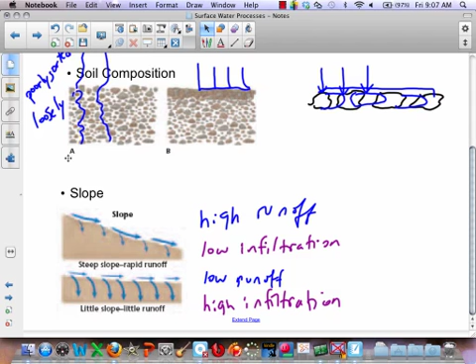I am going to talk a little bit about stream systems today, but we're really going to get into a lot more detail on how streams work, not tomorrow, but on Monday. So I thought you guys might appreciate this watershed, since it does kind of include us in Fort Wayne.

What is a watershed? No, it's not just a shed full of water. You guys ever heard of that before, a watershed? Nope. Is it like that big gallon thing? That's water. Say that again. That's more discharge. We'll talk about that on the next lesson.

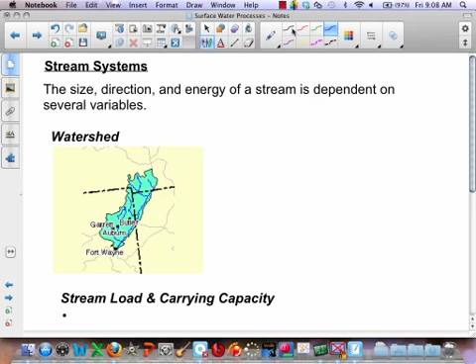The watershed is really the drainage basin for any body of water. So when we think about the river right through here, we're talking about the St. Joe River. That's what this big blue line right here is. And when we think about the watershed, it's all the area. That's the big thing I want you guys to know. It's the area that drains into the body of water.

So you have your watershed, and that's basically all a watershed is. Now the problem is, we think things are far away and won't affect us. But let's say that somewhere way up here somebody is not disposing of their chemicals correctly, and they're just dumping it in the ground or in a small creek. Well, it affects everywhere in this entire drainage basin, because that chemical is going to flow down the river and through the groundwater, and it affects the entire watershed of that region.

So a single location can directly affect a very large area based on the watershed, and that's really important you guys understand that. The other thing I want to point out is this really funny boundary. What is that boundary? Why does it stop there? Think about how water flows. Why does the watershed stop here? What's really going on there? Yeah, so what does that tell you then? How did the slopes end? What does that really mean?

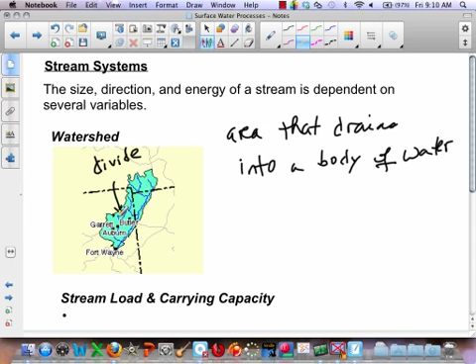It's the peak. We call that the divide. And that means that right now, all the water in here is moving in this direction. On the other side of the divide, it's moving in that direction. You guys heard of the Continental Divide? Runs right down the spine of the Rockies. That's literally the difference between draining into the Atlantic Ocean and draining into the Pacific Ocean. That's the divide. That's your drainage basin.

What river has the largest watershed in the entire United States? Mississippi. The Mississippi drains water all the way from the Continental Divide of the Rocky Mountains to the divide of the Appalachian Mountains. So that entire middle section, 50% of the United States, all drains into the Mississippi River. That's why we're having such a large problem with Asian carp in our region. You guys ever heard of that?

It's an invasive species brought in from Asia, and I don't remember which country it was brought in from. It was brought to a water treatment plant, just like we have here in Garrett. You got sewage, and you got to treat the water when we reuse it. The carp were brought in to eat the nasty stuff left in the pools, and they do a great job. That's what carp do. They eat all the crap at the bottom.

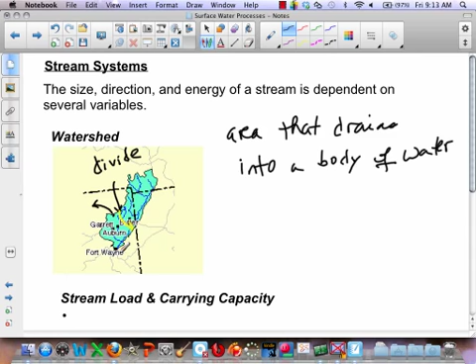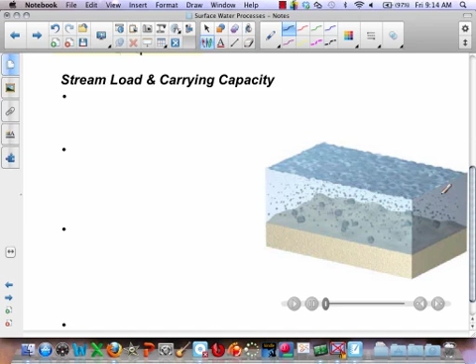Alright, so that's the watershed. Now the next thing I want to tell you, hey, wrap it in. Let's go. Okay, this is going to be really important that you guys make this connection for next week, and that is this connection between stream load and carrying capacity. A couple of things I want you guys to know. First, the stream load is all the stuff that it carries.

In some of our most polluted rivers, that can include tires, bikes, cars, and bodies if you're from Flint, like myself. Yeah, the Flint River was always the happy dumping ground for a lot of people. They had dams all the way along the Flint River, and so occasionally they would open the dams and let the river kind of drain down. There's a lot of missing people that they find.

But that's all part of stream load. So they just open up the dam and a bunch of bodies fall? No, it's not like that, they find them along the whole length of the river. Okay, let's not open that can.

All right, so basically we talked about how the stream load is carried. It's carried in two different ways. It's either held in suspension, so you're kind of floating in the water. And that's not on top of the water, but floating in the river, in the water column. So all these specks, that's basically being held in suspension.

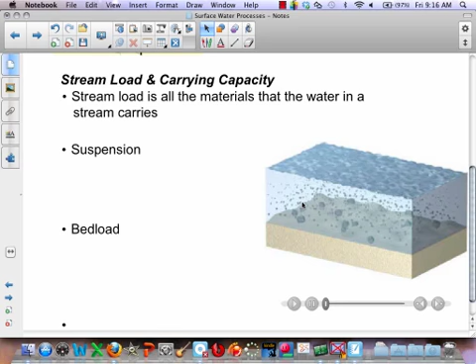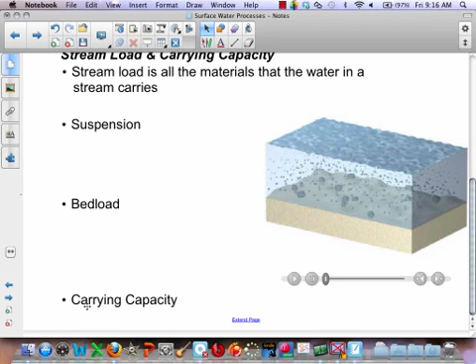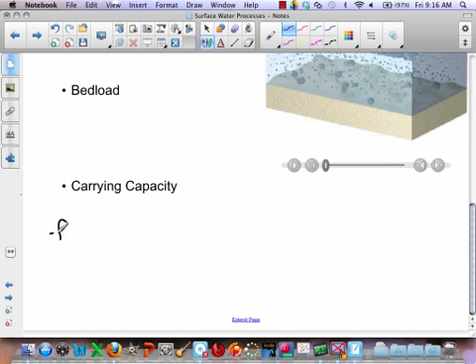Now, I wish I had a good way to really represent this, and I really don't. Basically, all these is something called carrying capacity. And here's what I want you guys to know, and I really wish I had a way to demonstrate this, and I simply don't. So I want to make sure you guys make this connection. The faster water is flowing, so therefore the faster the velocity, the more the river can carry. So the faster it's flowing, the more it can carry.

Now this is going to lead us into a lot of really important discussions here. So the more it can carry. Does that just mean more sediments, or does that mean more mass? Both? You're right, both, right? So if I'm moving super fast, that means that I could probably pick up heavier items and keep them held in suspension, right? Does that make sense? Okay, so that's basically what I want you guys to think about with this. So the faster I'm going, the bigger stuff I can literally pick up and move down the river.

Okay. Remember we saw the episode on the Alps, and they were talking about how the river literally floods down the valley, and the faster it's flowing down, they get the huge boulders. You guys remember seeing those huge boulders rolling in the river? Okay, that's because the river is flowing really, really fast.

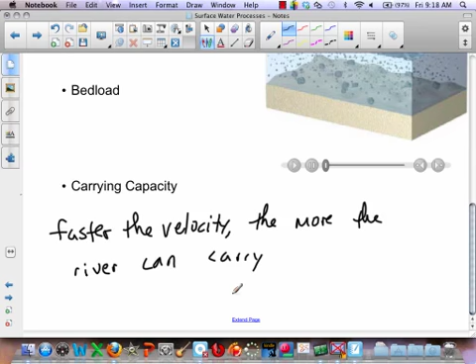The faster the water's moving, the more it can carry, and by more, it can either be more stuff or bigger mass. Okay, but it does have a capacity, so there is a limit. And once you reach that limit, the heavier stuff does what? It sinks. It falls out of suspension and gets deposited. That's carrying capacity.

And so we're going to see that right here, where we have the lighter stuff flying through in suspension. You can see the lighter pebbles. See how they're kind of getting bounced up? You guys saw that one little bouncing around? The bigger pebbles are simply rolling down the river. Okay, so you have suspension, and then you have your bed load, where you have the bigger pebbles slowly rolling, and then the lighter ones are just happily bouncing along. Okay. So it's kind of like just what we talked about before, right?

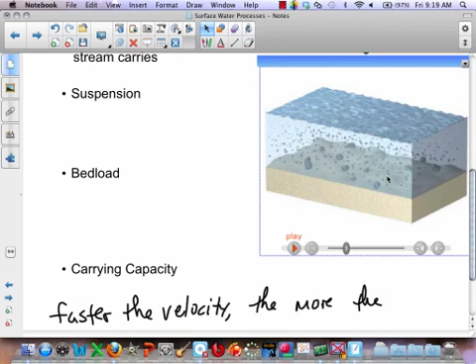You've got Eeyore, and then you've got Tigger. Okay? That's basically what we have here. Okay? So, that is carrying capacity. Guys, make sure you make that connection for Monday. Okay, that's going to be really, really important.

Now, here's something else that's really important. Think about if you ever get to be the wonderful person who has the horrible job of being the city planner. This is not a job I would ever do. No matter what you do, it's never good enough. City planners have the wonderful job of trying to figure out what to do with the resources for the city. And basically, the problem with cities is they like to be organized. Especially in the United States, we like to have our little grid-work systems for our cities. We like to have things straight line, nice and neat, everything's perpendicular.

Makes it easy to get around, except for Fort Wayne, which until you get a city map, confuses the heck out of everybody. Okay. I never understood how I can travel on the same road, and yet I have 3 different names I just crossed. So, okay, you want to talk about theoretical math? How do 3 parallel roads intersect at the same point? What? How? Seriously, you notice that? You have Clinton, you have Coldwater, and then you have Lima, and they're all parallel. They all go north and south, and then you get down to Glenbrook Mall, and they all merge to the same road. I'm telling you, go buy stuff from the mall. Yeah, it's actually a perfect place to put the mall. All right, so all roads lead to the mall.

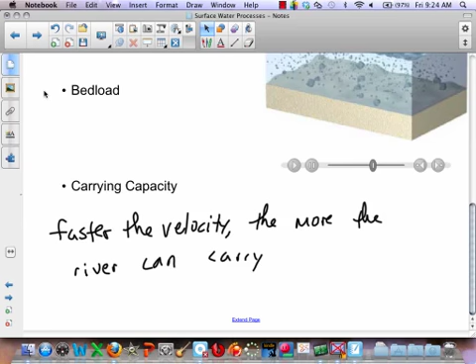Okay, the last thing I want to talk about are floodplains.